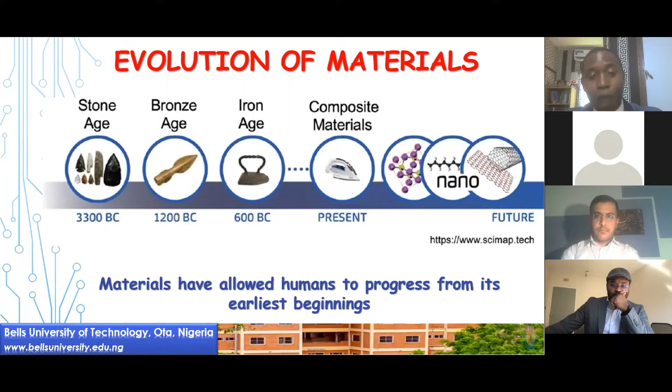So the world is evolving materials over time, from the Stone Age to the composite materials age, and now the future is talking about nanomaterials. Materials have allowed humans to progress from early beginnings into a new phase. So we have to begin to change our thinking. Everything we hold, where we are seated today, it's all about discovery. That is why I said the science of materials is applicable to every field of human endeavor.

The following fields are considered, starting with aerospace. We can't do anything without materials. We have aerospace materials, a new space age, because the world is evolving. In defense, we talk about high-performance defense materials and supersonic jets, all produced through materials evolution. Then in biomedical applications, we transform our materials usage into biomedical implants. So it's all about materials; we can't do without them.

Semiconductors in all spheres, with semiconductors and zinc infusions, these are all electronics made with materials. Then we talk about oil and gas. We saw the evolution of materials in gas pipelines. But even when materials are everywhere, we cannot escape their deterioration. That is very important.

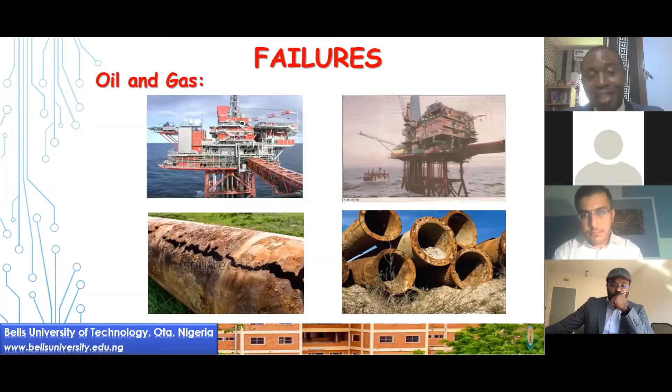But we have deterioration all over the space. Now we have the oil and gas and the deterioration of the oil and gas. Materials have to come in place by finding a way to reduce the failure rate of this material. But see, I'm trying to show you some of the catastrophe we see due to corrosion and mitigation of corrosion in place. Now, what are we going to do?

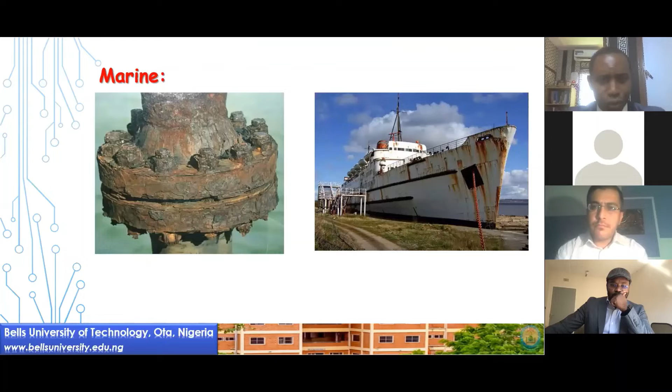Materials, especially in recent time, have these good properties, high strength, availability, but they still go bad. And we can't allow them to go bad because the challenges have been becoming uncontrollable. So there is a need. From studies, it has been realized that 85% of steel components are made up of mild steel. There are challenges of corrosion. And what are we going to do?

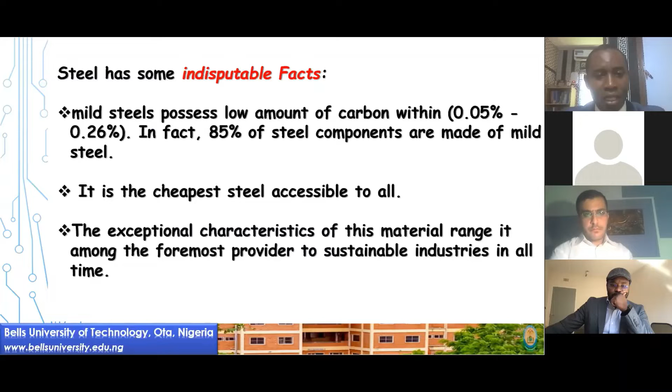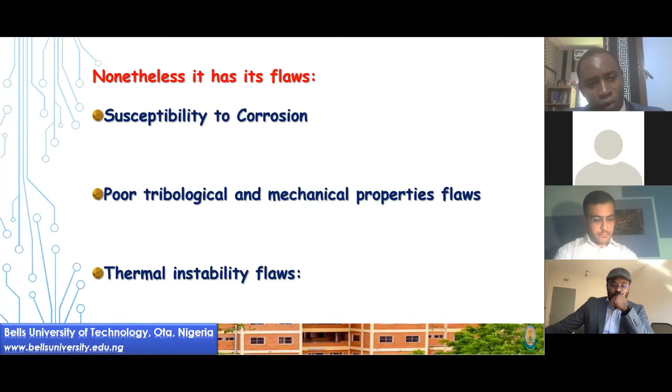Hello, everyone. Can I suggest that we turn off our cameras so that the good professor can present and use his own camera, please, so that we can save some bandwidth? I think that is why there is interference. But Prof, go ahead. Prof, it seems you are muted. Am I on now, please? You are audible now. Go ahead, sir. Thank you very much.

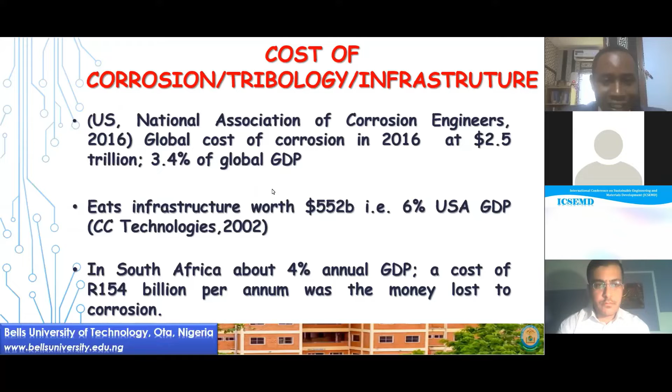Despite the challenges we are having with the oil and marine industry, now we have to find a way to combat it with the issue of materials. There are a lot of methods that have been used: alloying, cathodic protection, coatings. Coatings have been performed, by galvanizing or other manners. But can we look for simple techniques to improve operation? Maybe versatility of the materials, few size and shape limitations, especially when we're trying to look at weight reduction.

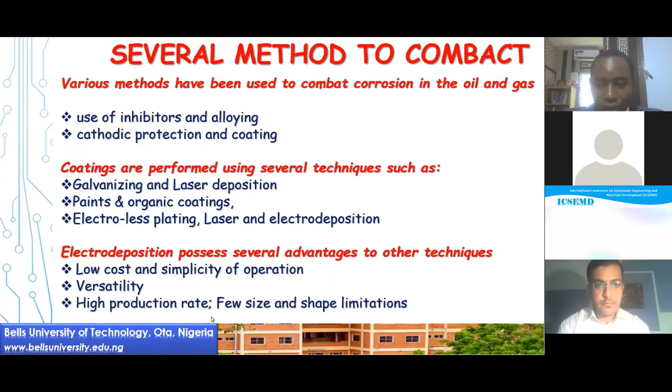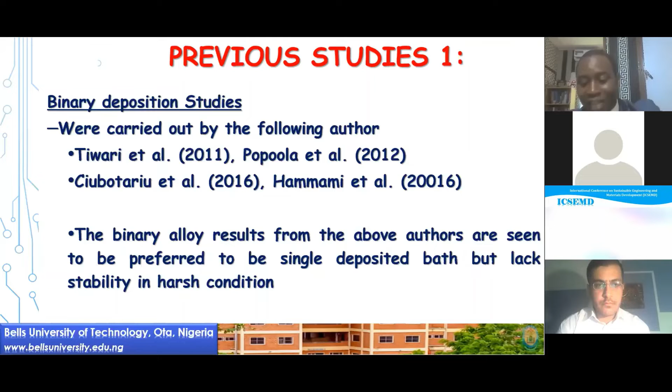In my own research, effort has been made over decades to find a way of developing stable binary zinc with the addition of nickel and cobalt over time. You see from my citations, and now we have what I call composite integration into zinc alloys from agro-based infusion. These are studies I've done. From binary deposition of coatings, we improve into ternary deposition, the multi-component ternary deposition of coatings, for corrosion mitigation and improvement.

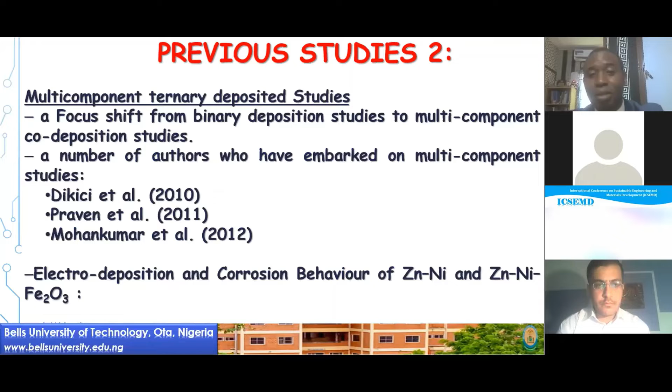Now, more importantly, there are three major problems that always arise with steel: the challenge of structural deformation, wear, and threats as a result of the harsh conditions where those materials have been applied over time. We were able to come up with something. These are my research plans for this topic, what I'm going to present today.

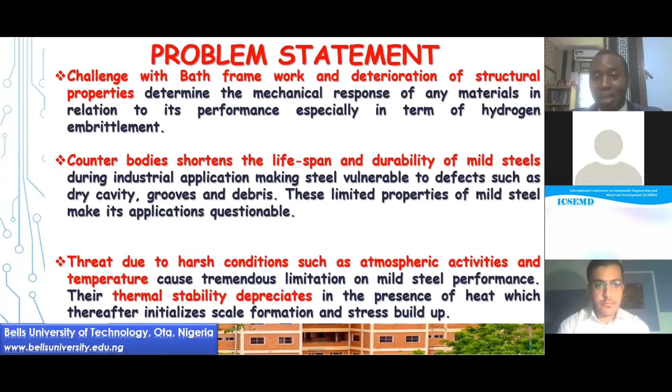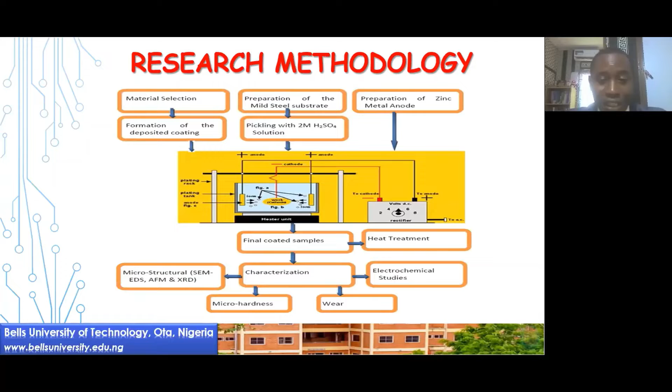We try to manufacture a composite particulate strengthening material of this series with aluminum and titanium in the presence of eco-friendly materials. From our studies, we apply a material deposition methodology. We select the material, we do the deposition techniques, then we characterize the properties involved. Here is the schematic diagram of the design we used and the evolution of the coating: the anode and the cathode within the electrolyte. The electrolyte has been developed with eco-friendly materials to see the effect.

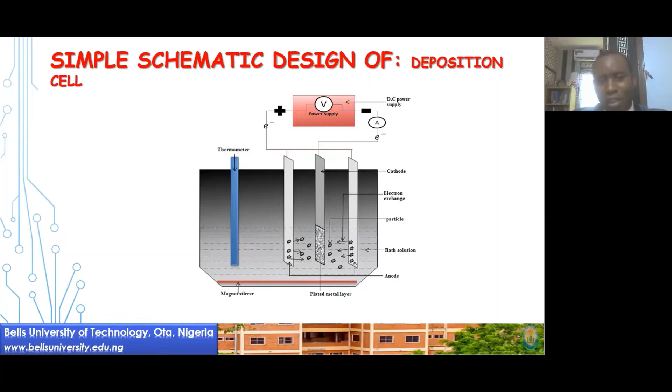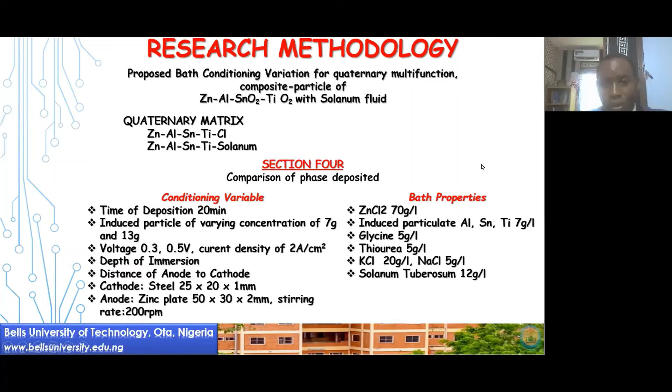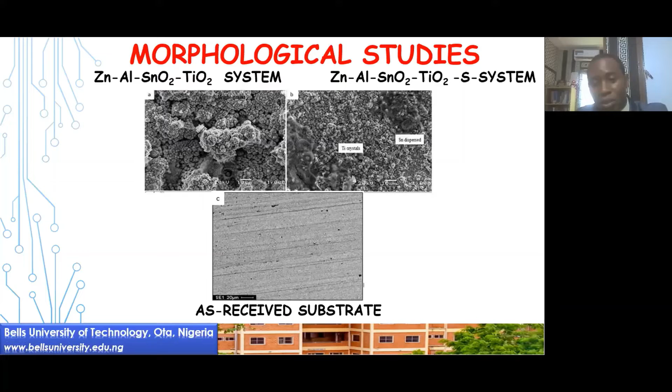Now, this is the morphological example here, with little peaks around the corner. This is the as-received zinc titanium material. When it is added with Solanum, there's an improvement. Without Solanum versus after Solanum, we see better fine grain structures, which is expected of the material. After that, we study, using AFM, atomic force microscopy, the differences within the two.

This material is very good morphologically and topographically across board, with the system having Solanum. Now, we also did a little X-ray diffraction analysis to be able to see the peak formation. The intensity at 12,000 is also still giving us a very good result, with the Bragg's angles and the presence of the expected peaks, which are also there as expected.

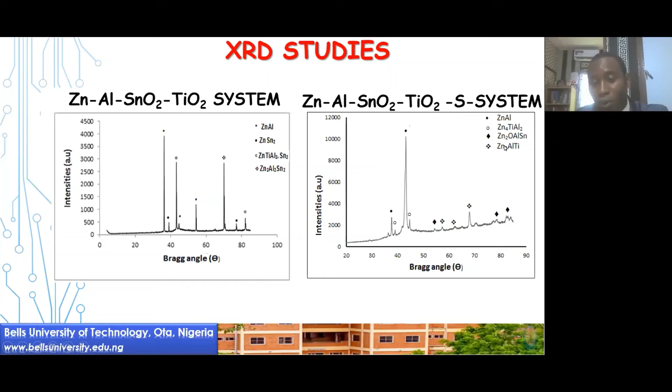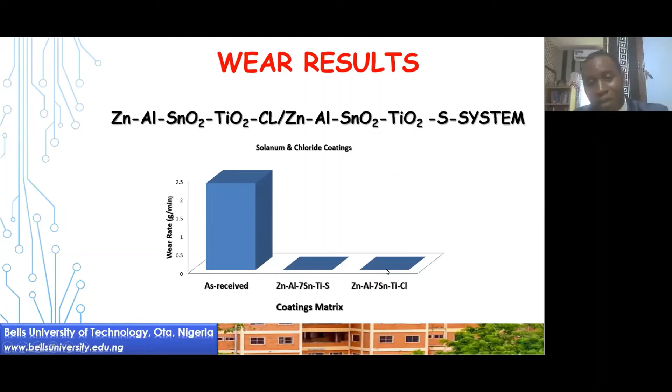And this is also the wear property. We tried to look at the wear deformation behavior. See, we have a very low wear. You look at Solanum also, it's still performing very effectively compared to the one that doesn't have it. And after this, we tried to look at the coefficient of friction. You see the as-received sample having a high one, with the Solanum having a very low coefficient of friction, including again the sliding velocity. You can see a very good structure across board.

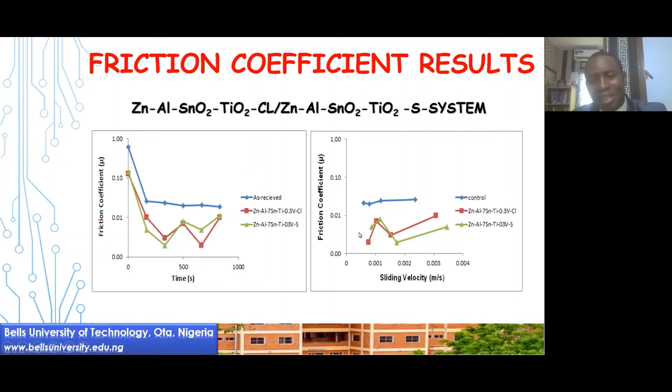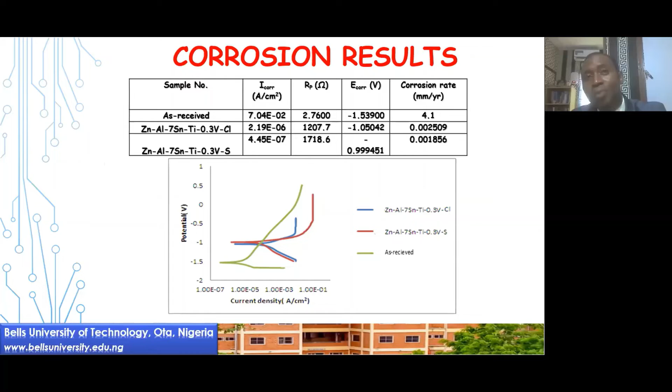So that shows us the importance of the nanoform. So we did the corrosion test, and the corrosion result also showed the same result. Materials having a better infusion. The materials world is a unique one. You can play with materials, and that is where the impression of the coating effect comes in. After the thermal studies, we tried to do thermal stability studies.

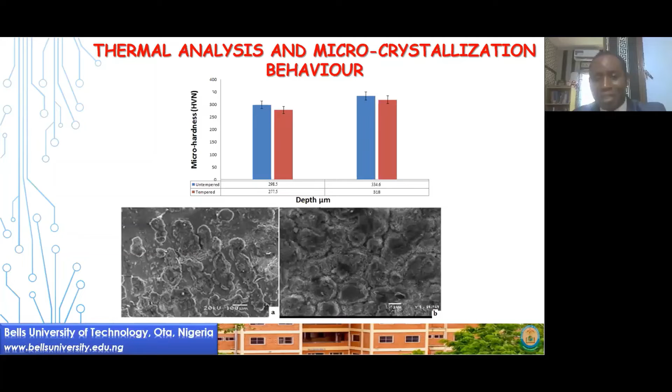The future of materials is all about smart materials and graphene. We also have nanotechnology. So we have to begin to look into that. That is the future of materials. Any material we have with an effective improvement. This is where all materials engineers must begin to look into what we call smart materials now, the wonder materials, the process improvement over time.